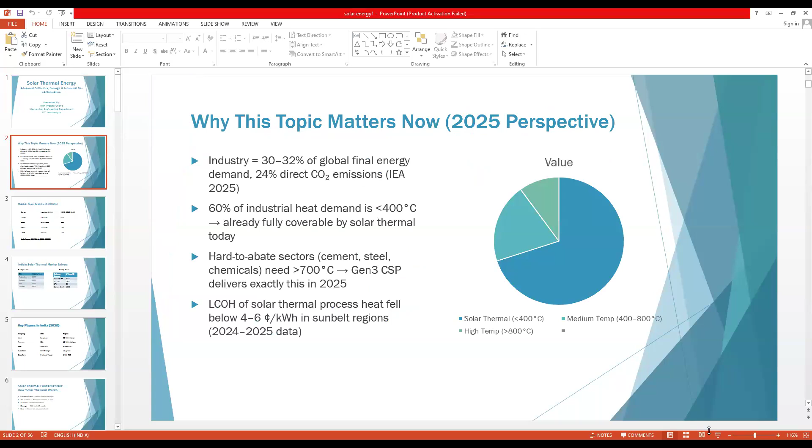First, I would like to say why we are focusing on solar thermal energy in this new era of generation. As we know, energy is the main source of economic growth of any country, and for India, with respect to global growth, we are pacing to achieve our target as per PM Modi's planning of Viksit Bharat at 2047. With that goal, we are trying to achieve the economic growth of India with the help of the energy sector, which is available and growing day by day, so that we can achieve our goal before the targeted time.

We can see that the industrial revolution came into the picture in the 1780s, when the steam engine was invented. After that, the internal combustion engine started to work, and that brought the industrial revolution all over the world. After the Second World War, energy demand increased vastly. People began using fossil fuels everywhere, in industry, at home, or in the automobile sector. Every industry began to use the internal combustion engine for their purposes, and we began depleting all the minings, like the coal sector or oil sector.

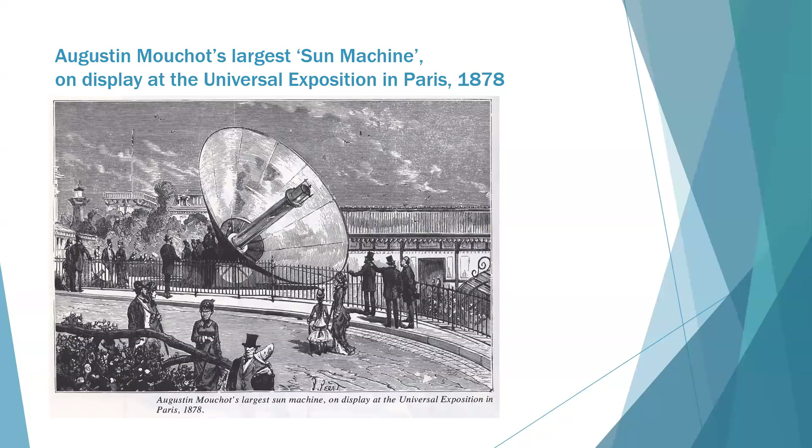This picture shows from which time we are using solar energy. This is one of the oldest pictures, where Augustin Mouchot's sun machine was displayed at the Universal Exposition in Paris in 1878. So we cannot say that solar energy is something we are using only nowadays. It took about 100 years to develop solar energy as an alternative source, because this was the first time people were thinking about how to capture solar energy for domestic purposes.

There's also an old picture of the Bell System solar battery, which converts sun rays into electricity, an advertisement from Look magazine in 1956. That was the concept when solar photovoltaic cells came into the picture, along with the thermodynamics of converting solar energy into electrical energy.

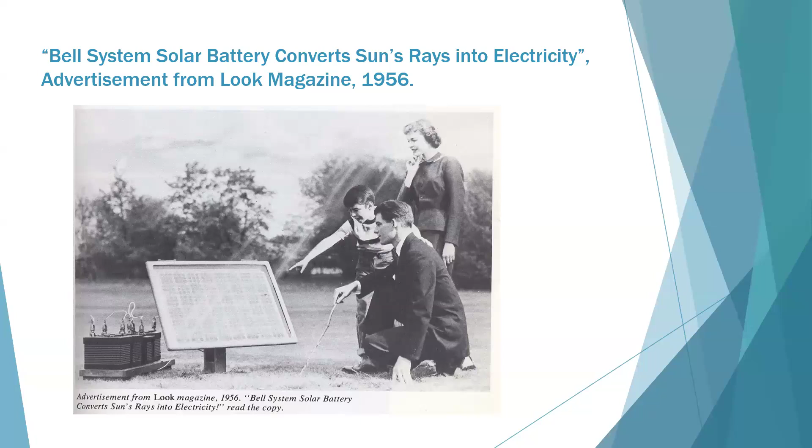Now we can say that the utilization of solar energy has various uses, and we can use this solar energy in different ways.

Here we can see that solar energy can be utilized in two ways. First is solar thermal, and second is solar photovoltaics.

Solar thermal energy can be used for heating and cooling. In terms of heating, this energy can be used as a solar air heater where air is heated, and a solar water heater where water is heated for utility purposes. The third use is drying of agricultural products, where this heating from solar energy can be utilized for drying agricultural products.

Another purpose is cooling, where solar energy can be used for the vapor absorption refrigeration cycle, for storage purposes of foods in cold storage. Another utilization of solar energy is as a photovoltaic cell for solar pumping or electric power generation.

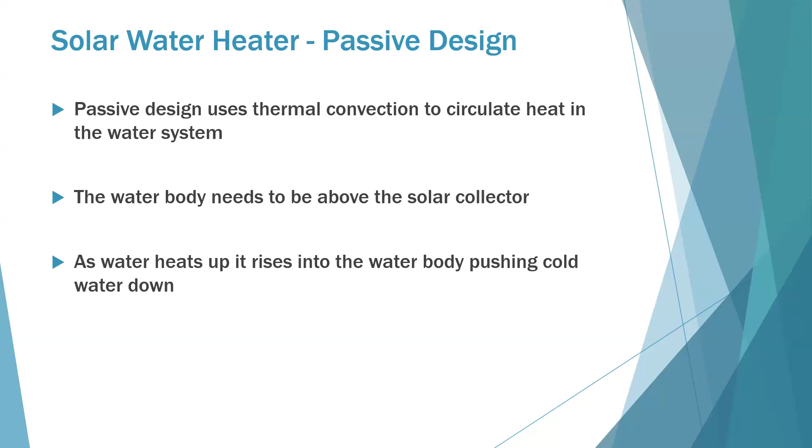And passive design means we are not providing a motor to circulate the cold water and hot water, but due to the density difference, it circulates according to the design. So this passive design uses thermal convection to circulate heat in the water system. This is a simple example of this passive solar water heater design, so natural circulation is given.

And for the active design, we have to provide a pump to circulate the water from the cold storage to the hot water system.

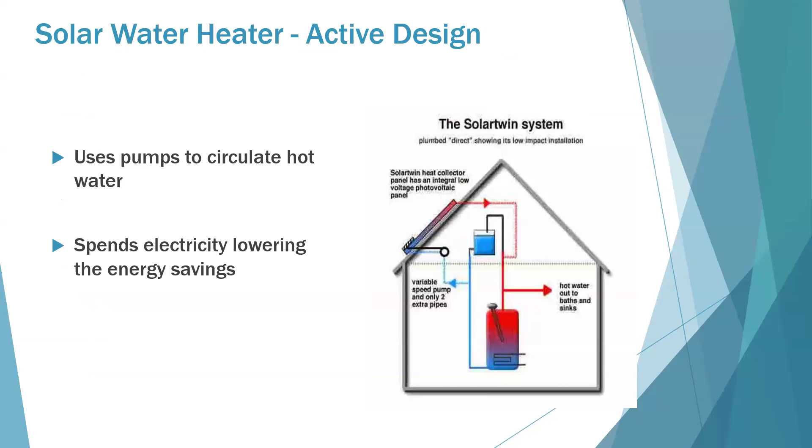Application: in a household, heating and cooling costs are among the most energy intensive domestic activities. Solar water heater can replace the cost of heating water for either a pool or hygiene uses. To demonstrate the ability of a solar water heater to offset domestic uses, interns will set up a solar water shower and hot tubs. Heating can also be provided to bioenergy activities to increase efficiency of the process or make the process more energy independent.

So we can say that the solar collector should be placed facing south and at an equal angle to that of the latitude of that place. That is the most efficient way to place the collector. And to increase efficiency further, the angle should be increased by 15 degrees during the winter season and decreased by 15 degrees in the summer. This makes the angle to the sun closest to 90 degrees during seasonal changes.

And now coming to the solar air heater, which is another application of solar energy in terms of domestic and commercial purposes.

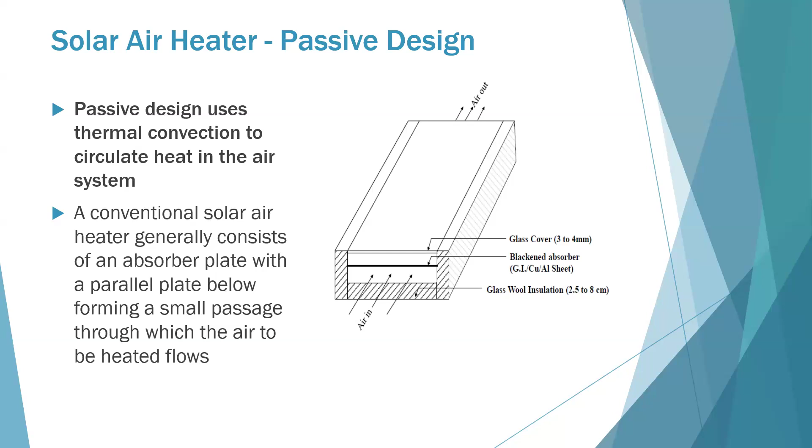This is the practical picture of the passive solar air heater design, where no motor is fitted in the system for circulation of the air, due to the hot air and cold air density difference. The movement takes place due to this.

This is another example of the solar air heater with herringbone fins. That means fins are provided under the absorber plate to increase the efficiency of the solar air heater by providing more surface area. And as we know that heat transfer depends upon the surface area, due to that we are increasing the efficiency of the solar air heater.

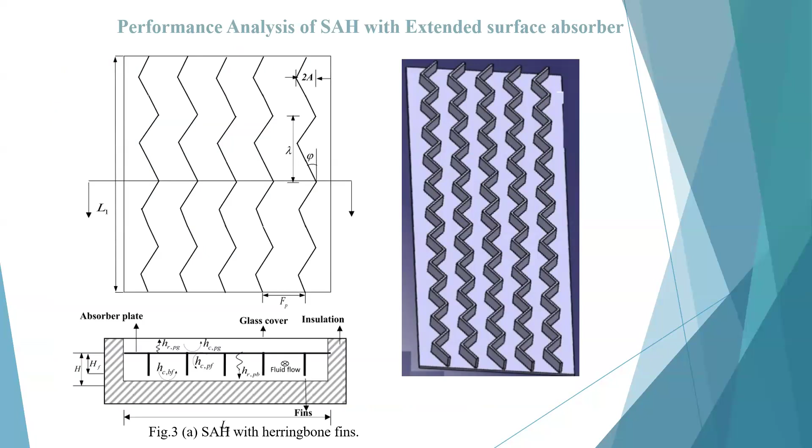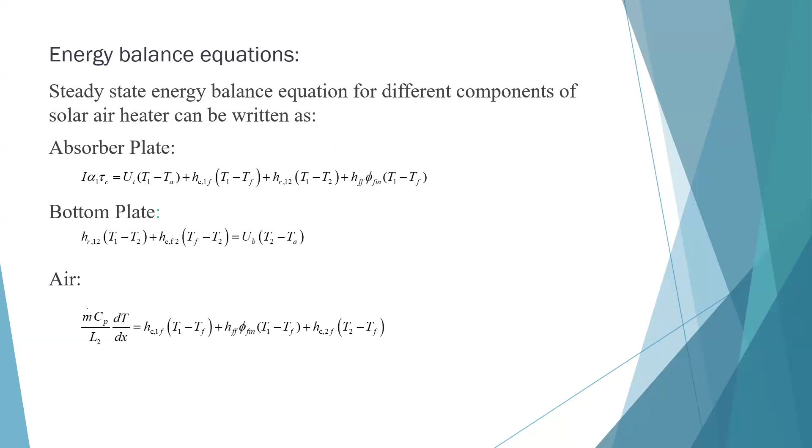We are using these equations, and in the pictorial view, we can show how the energy balance for the considered control volume for the absorber plate, bottom plate, and the air flow takes place. Upon calculating or taking the data of temperature, we can calculate the thermal efficiency of a solar collector, which is the ratio of useful heat energy gain to the total incident radiation on the collector during any period of time. And thermohydraulic efficiency, after calculating this Q, we can calculate the thermohydraulic efficiency also, and upon which we can say how efficient this solar air heater is.

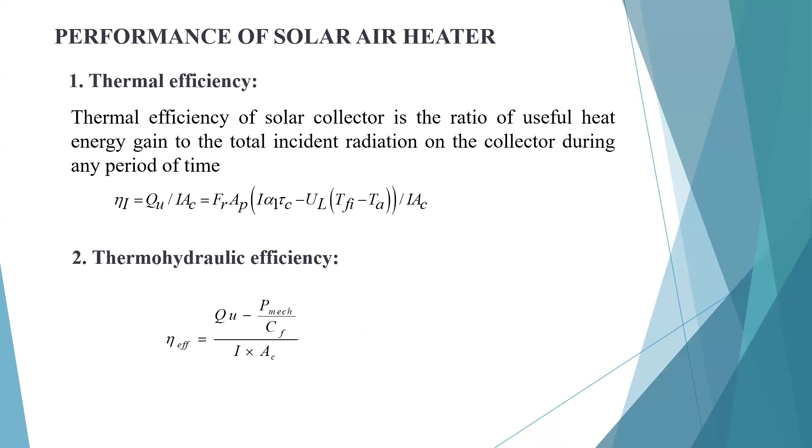So we can say that there are different types of solar air heater depending upon the different collector design. That means double exposure collector, honeycomb collector, thermal trap collector, two-pass collector, overlapped glass plate collector, artificial roughened absorber solar air heater, packed bed solar air heater, extended surface absorber solar air heater. So these are the different types of solar air heater based upon the collector design and the heat capacity resistance of the material.

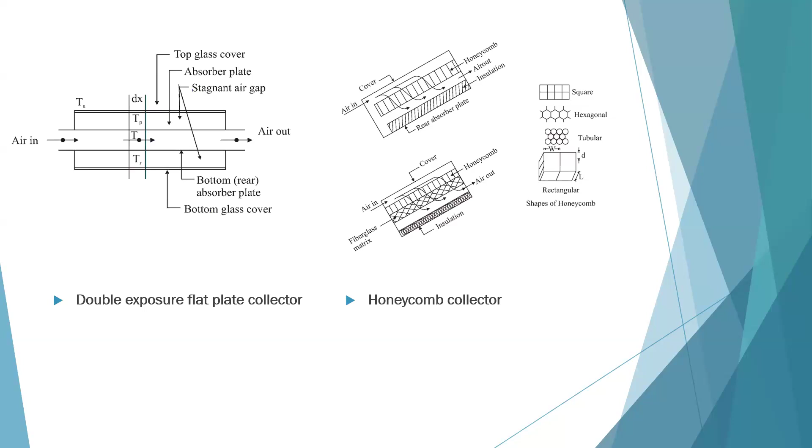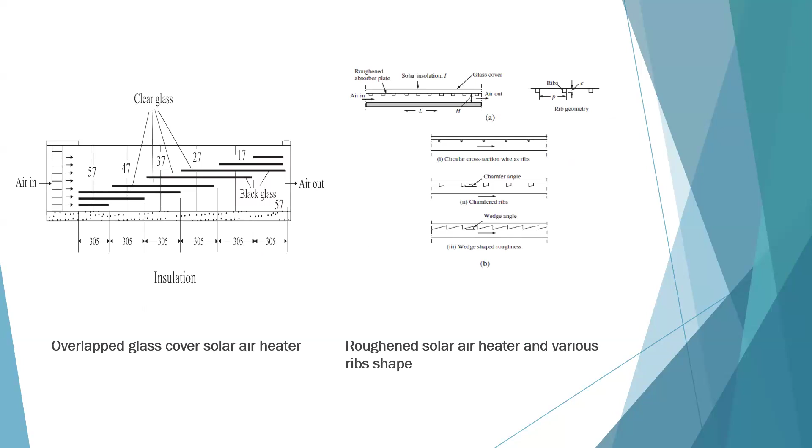So application of solar collectors, you can say that this includes solar cookers, solar chimney, parabolic trough, solar distillation, parabolic dish, solar water heater, solar air heater, and central receiver system are the main utilizations according to the requirement.

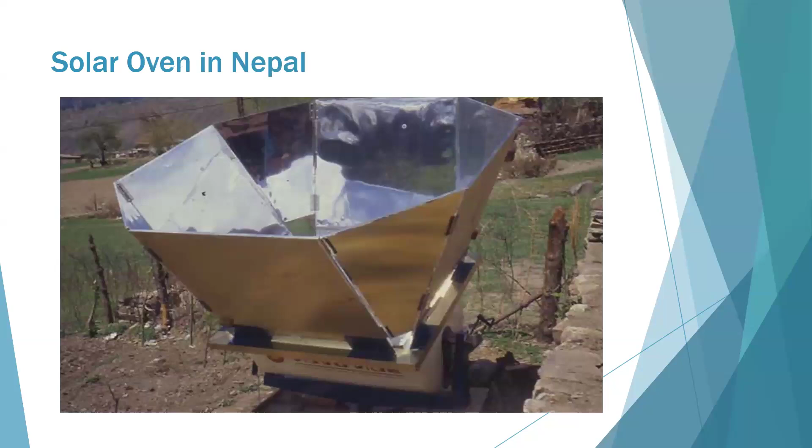Solar cooker, as just a concept of the solar heater, uses solar energy to cook the food when we are concentrating all the solar energy to a certain focus point. That means solar cookers or ovens are primarily used in developing nations as a primary method for cooking, using passive solar heat to cook the primary meals. An insulated box that collects solar radiation, enhanced by reflectors attached to each side, and that helps combat deforestation. So these are some examples or pictures - this is the solar oven we are using in Nepal.

So this parabolic dish or solar furnace is a large reflector that concentrates thermal energy into a single focal point. This focal point can contain a Stirling engine to generate electricity, or the energy can be focused and used in industrial processes. So on a small scale, a reflector can be used in the same way as a solar oven.

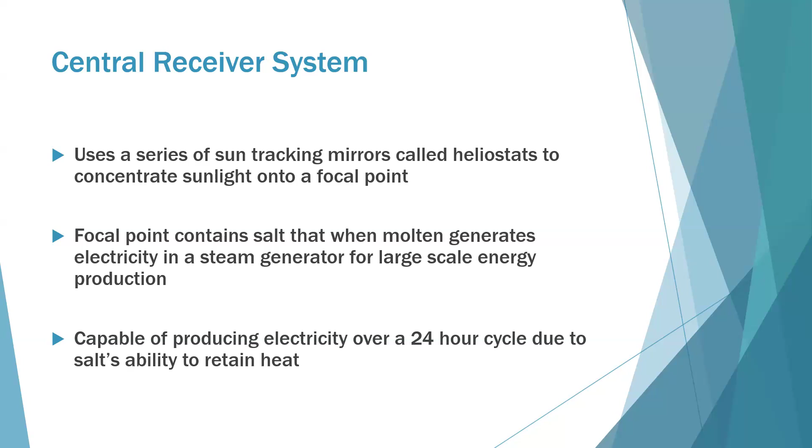Another example of solar energy use is the solar chimney. That means ambient air collected within the chimney rises as it is heated through solar radiation and drives a turbine, which generates electricity. The base captures heat through absorption of a black surface and traps it by a greenhouse interface - a very inexpensive solar collector technology. This is just one example, set up by Spain, of an erected solar chimney power plant.

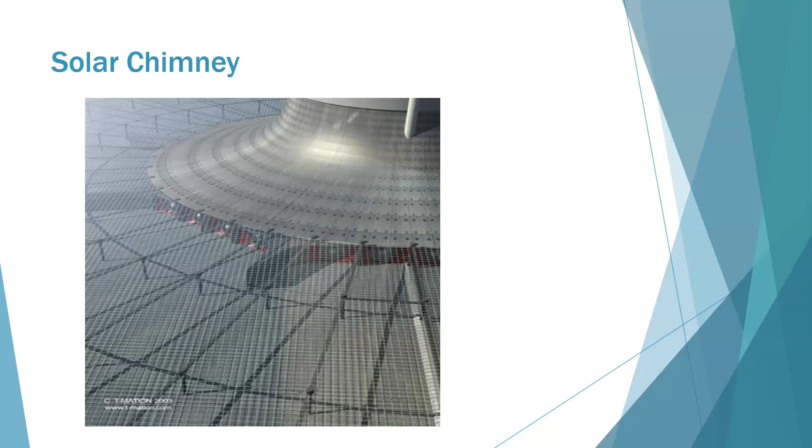Another use of solar energy is photovoltaics. This is nowadays a common topic for capturing solar energy, which generates electricity by absorbing sunlight and converting that light energy into electric current. There are many photovoltaic cells within a single solar panel, and the current created by all the cells together adds up to enough electricity to help power your home.

These are some types of solar cells we are using: polycrystal ribbon type and thin film, single crystalline silicon, polycrystalline silicon, and thin films. Nowadays, emerging technologies are arising in the area of nano solar techniques, including nano solar electricity conductive plastics, Konarka polymer, and dye sensitized solar cells, which are flexible and about 5% efficient.

Many research efforts are going on developing these different types of solar cells, which is a recent area of research. As an interesting fact, solar cells in the early 1950s were about 0.5% efficient, and today a model is about 15% efficient.

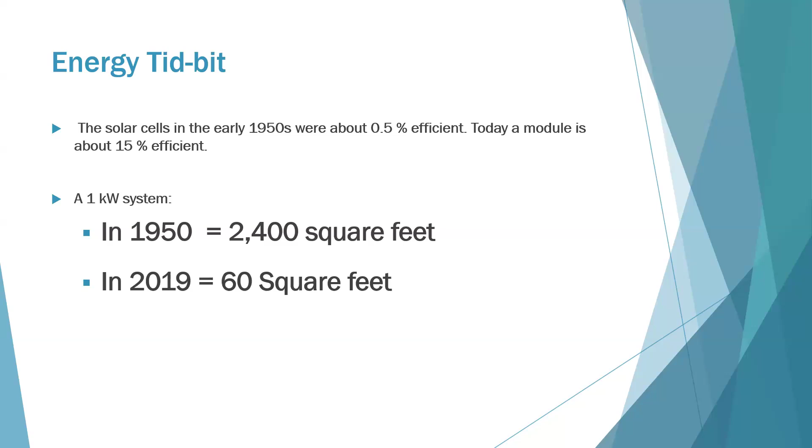This shows how we have developed solar cell technology to generate electricity, and we can say that this is the future generation of electricity equipment. In comparison to 1950, you can see how much area has been reduced, from 2400 square feet to 60 square feet, for the generation of 1 kilowatt of power.

Nowadays solar power applications in terms of photovoltaic cells have been developed in different areas of utilization. Not only e-cars, but almost every area is now using a solar power generated battery system. E-vehicles have evolved from solar vehicles to solar powered e-cars to EV vehicles, which have now become another alternative energy source.

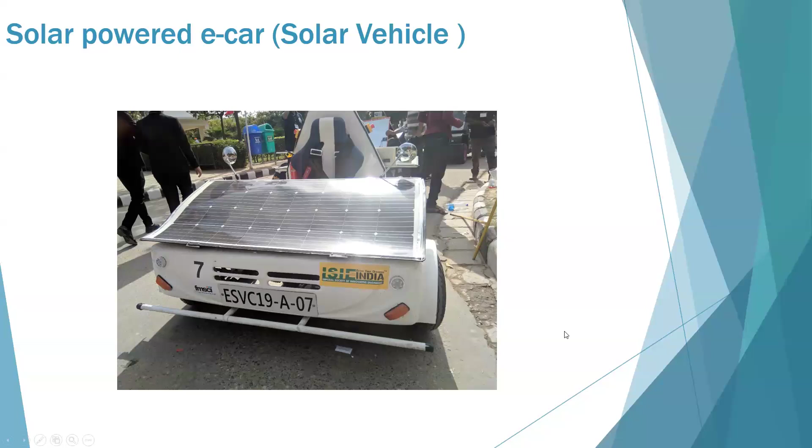So we can say that for the sustainability of our future, for our energy needs, we have to convert our mindset and our thought process from fossil fuels to this new generation of energy sources, which are more sustainable in comparison to our conventional sources of energy.

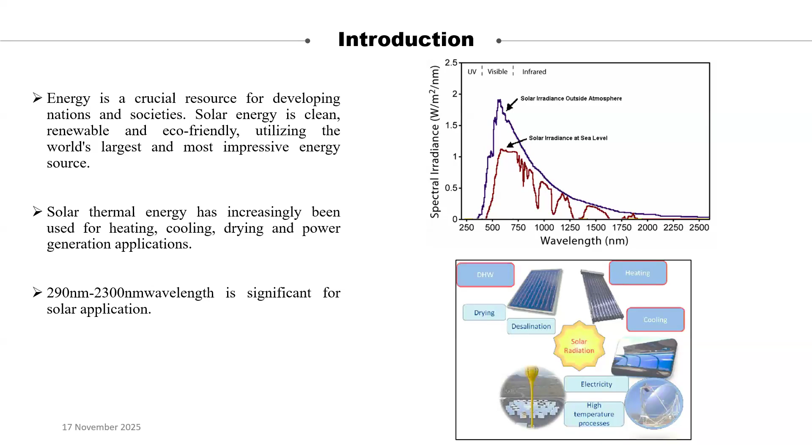So nowadays the research mainly focuses on latent and sensible heat storage.

However, 5.3% still comes from non-renewable sources and electricity, showing slow progress in decarbonizing this sector.

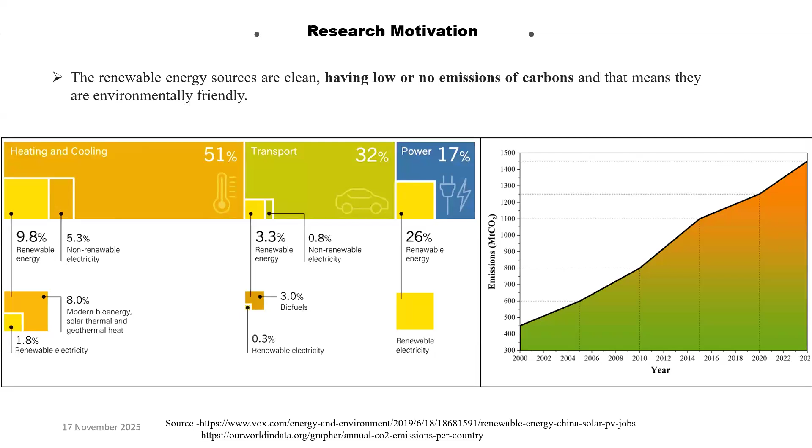So basically, the motivation behind this is to achieve low or no carbon emissions. We will also contribute through maximum utilization of solar energy to reduce CO2 emissions and global warming.

The solar air heater is the device I have mainly focused on. It is basically applied in different areas like space heating, drying farms, timber seasoning, paper mills, natural rubber, and so on. Basically, it is a non-polluting, renewable based energy device.

As in the case of the liquid flat plate collector, a transparent cover system is provided above the absorber plate, while the sheet metal container is filled with insulation provided on the bottom side.

In double pass, we can say there are more advantages compared to single pass, because there is less loss of energy due to the double pass. In single pass, losses mainly occur from the upper side, the glass side, as heat energy.

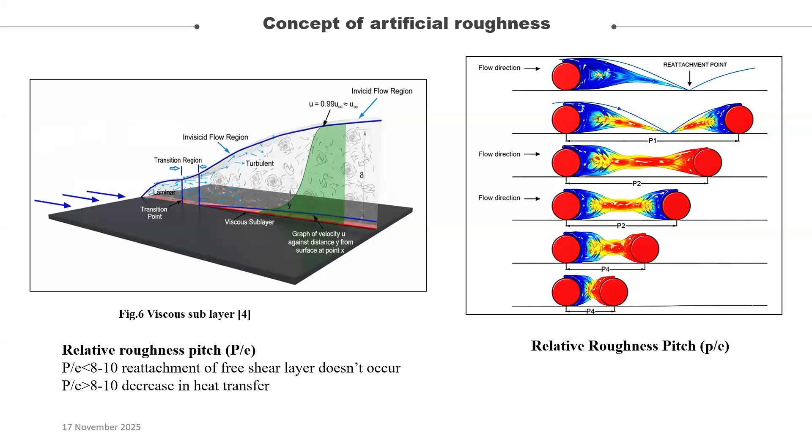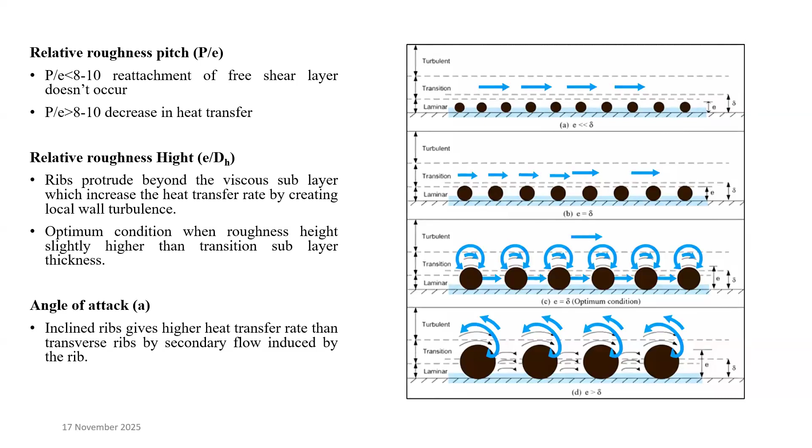The second parameter is the relative roughness height, e by Dh. The height of the roughness also plays a crucial role. If we do not optimize the roughness height, there is an enhancement of pumping power and losses of energy. So it is necessary to optimize the height of the roughness. The angle of attack also plays an important role, because it specifies the angle at which air flows over the absorber plate.

With thermal storage and without thermal storage, comparing both of them to specify which gives good performance. This involves the mathematical modeling and CFD analysis of the solar air heater.

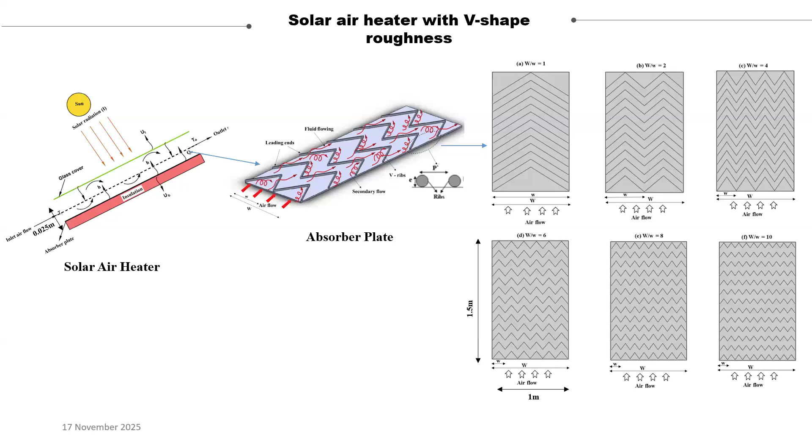After this analysis, thermal storage and CFD analysis will be performed following the mathematical modeling. There are some governing equations: the radiation transfer equation, continuity equation, momentum equation, and energy equation, which will be utilized in the CFD analysis to perform the analysis of the solar air heater.

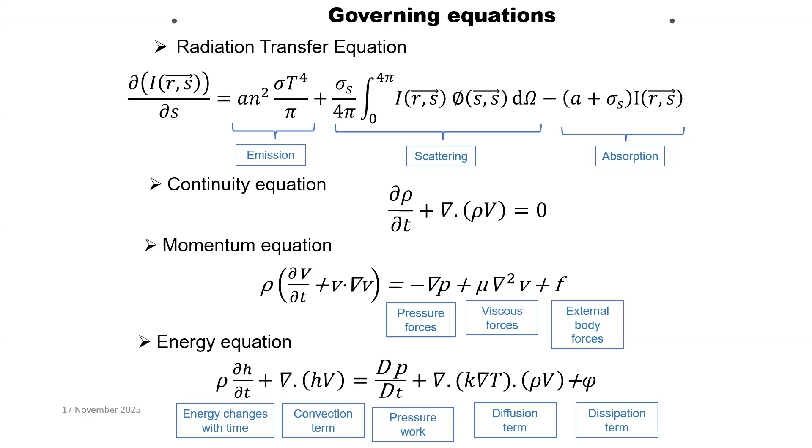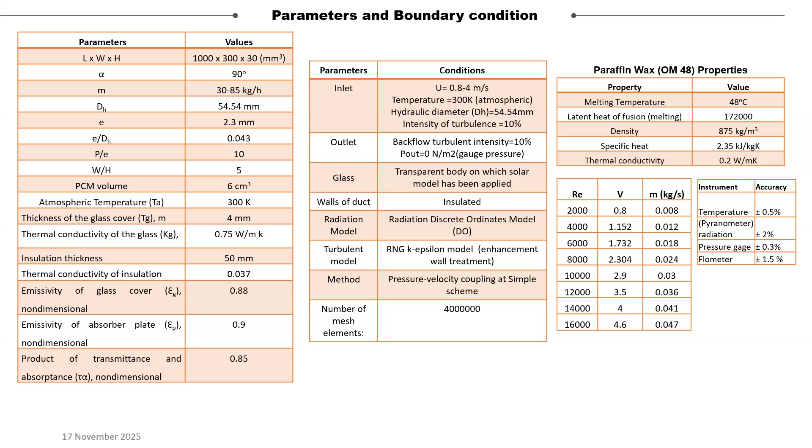For the thermal storage detailing, I have utilized paraffin wax, an organic PCM material OM48, which has a melting temperature of 48 degrees Celsius, a latent heat of fusion of about 172,000 kilojoules, a density of 875, and a thermal conductivity of about 0.2 watt per meter Kelvin.

This is the temperature contour for different roughness values of the absorber plate, which I have utilized as 1, 4, 6, 8, and 10.

We can see different temperature zones and contours shown on the absorber plate. Without roughness, the smooth absorber plate has high temperature, but the energy transfer from the absorber plate to the fluid is much less compared to the roughened parameter.

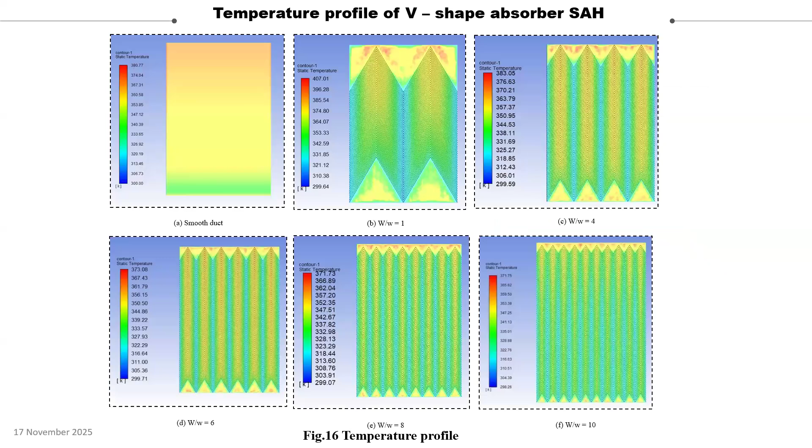So in further analysis, we can specify what is good for our absorber for our setup.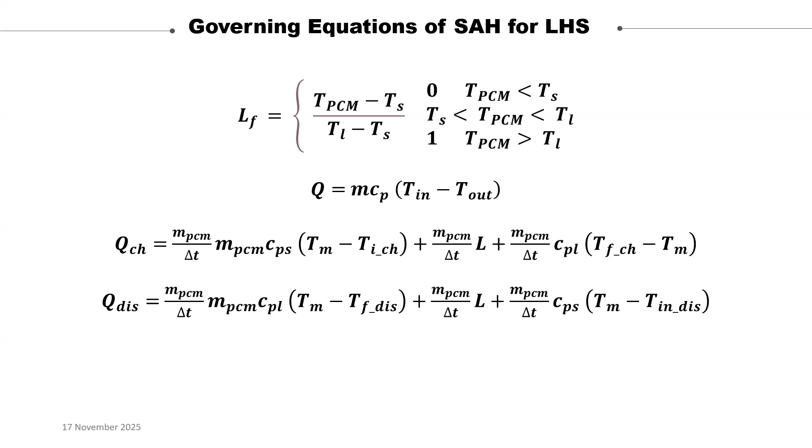The governing equations use the enthalpy-porosity method for the PCM to analyze melting and solidifying. A value of zero corresponds to solid, and one stands for liquid phase. With the help of this method, we analyze the performance of the PCM.

Based on the latent heat storage, it stores energy which we can use after sunset. So we switched off the artificial radiation mode to see how much time we can use this stored energy after the sunset, or after switching off the radiation.

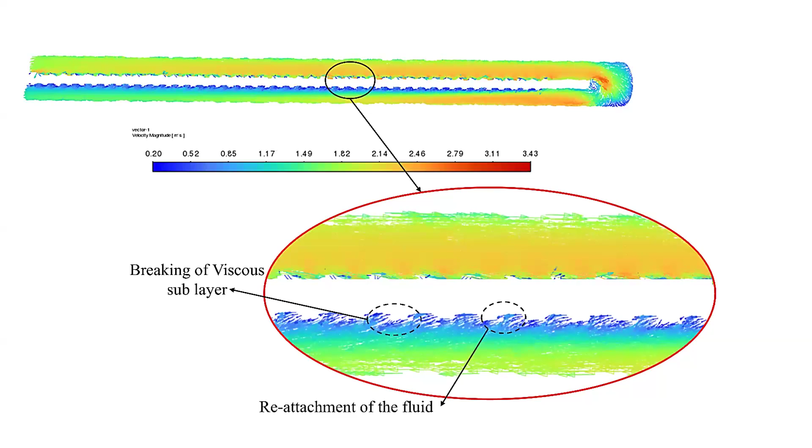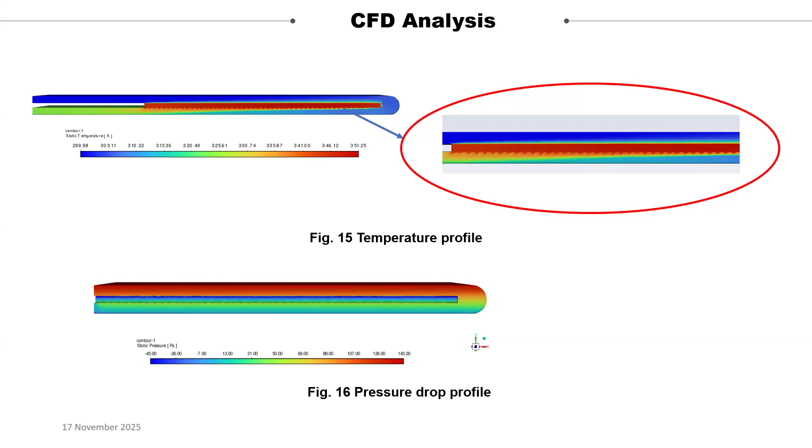This is a pressure drop. We can see the pressure drop also plays an important role in our setup, because we can find out the friction factor and pressure drop in the system, and how much power is utilized by the blower.

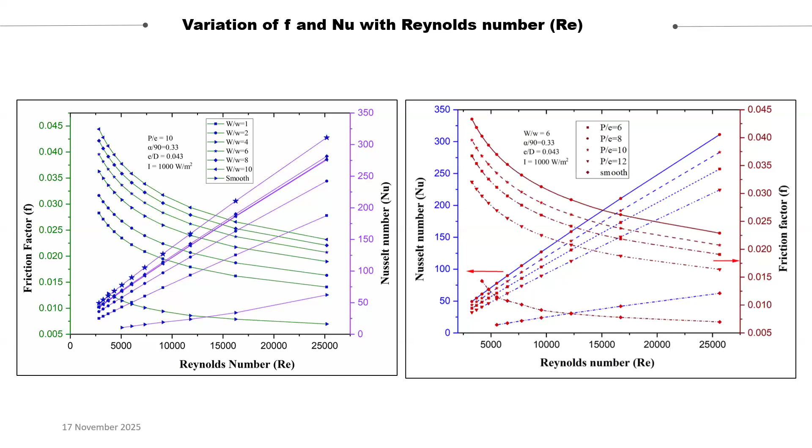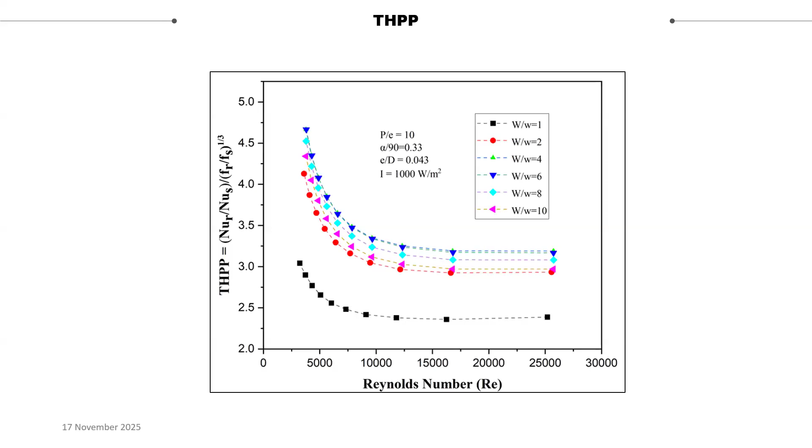The THPP, thermal hydraulic performance parameter, shows different values for different width ratios. Width ratio 6 also maximizes the thermal hydraulic performance, decreasing with increase in Reynolds number, with an average of approximately 3.0. THPP is actually the ratio of the Nusselt number of the roughened to smooth plate, divided by the ratio of friction factor of roughened to smooth plate, to the power 1 by 3. It is a dimensionless number which shows the performance of the absorber plate.

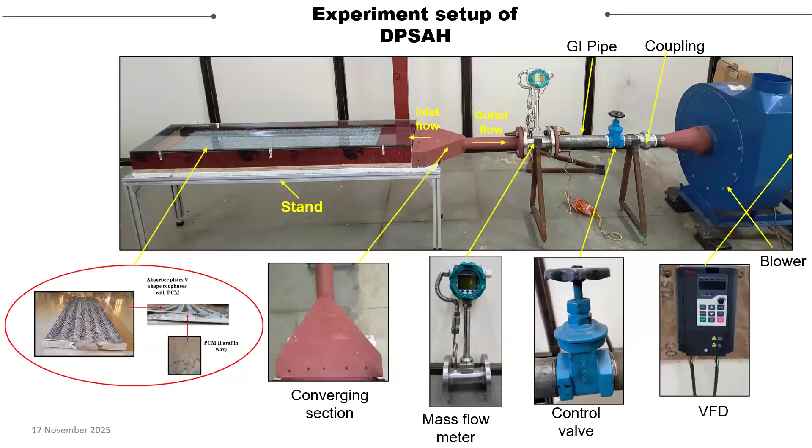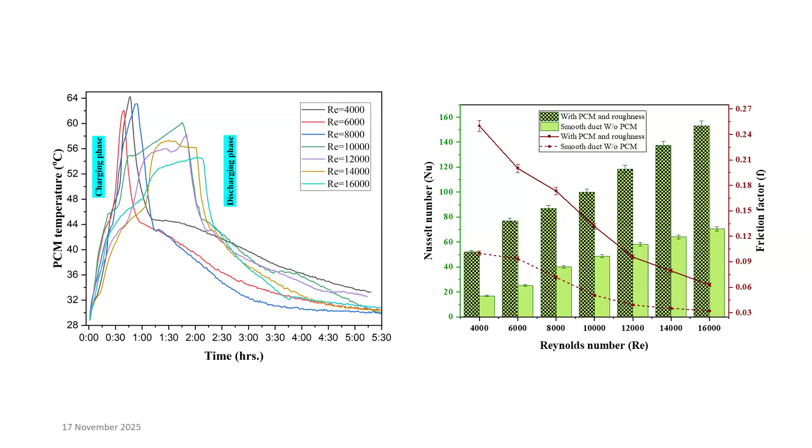This indicates the higher mass flow rate and hence the turbulent effect by the artificial roughness near the absorber plate, and the ribs configuration which breaks the viscous sublayer and creates free flow, hence greater convective heat transfer coefficient transferring energy to the air. At a lower mass flow rate, approximately 4,000 to 6,000 Reynolds number, it exhibits lower thermal efficiency, approximately 30 to 45%.

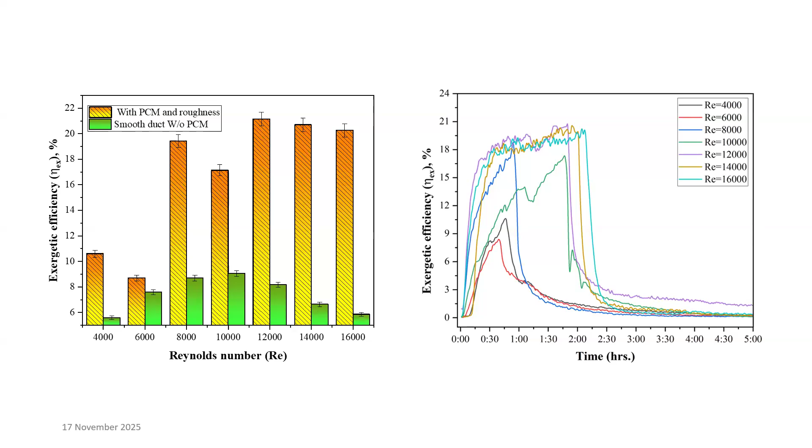Compared to the smooth duct, we can see there is much more exergetic efficiency with roughness and PCM. The right hand side graph shows the exergetic efficiency at different Reynolds numbers with respect to time.

And the heat storage, we have specified with Reynolds number. The heat storage with charging heat, discharging heat with respect to charging time and discharging time is shown in the figure.

In THPP, we can see the thermohydraulic performance from the experimentation. It shows higher values at approximately 6,000 Reynolds number and lower at 12,000 Reynolds number for the thermal hydraulic performance parameter at different Reynolds numbers.

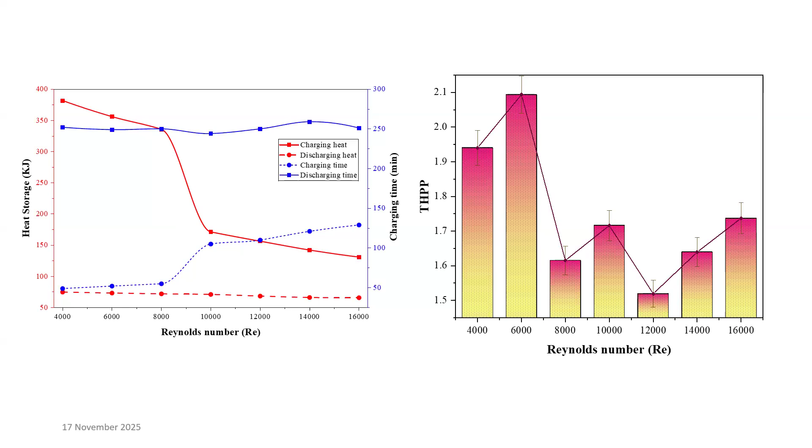So this is now the experimentation and CFD parts of our setup. Now, the social impact of this includes drying agriculture products like grains, fruits, vegetables, as well as seasoning food. In winter, solar heaters are used to heat a house and save energy. It is also a non-polluting and renewable energy source.

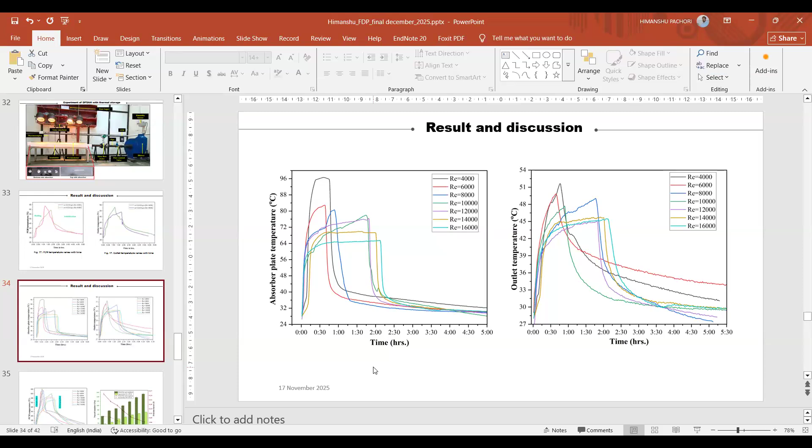Here the Reynolds number you had taken as 2000 also, but in your results you had not discussed the values at Reynolds number 2000, because in all the graphs I think Reynolds number started from 4000 onwards, is it? Yes sir, I actually used 2000 in without PCM, and in PCM I started from 4000, because at 2000 there is no effect in PCM. In without PCM I started from 2000 to 18,000, and with PCM I utilized 4000 to 16,000 because of the benefit.

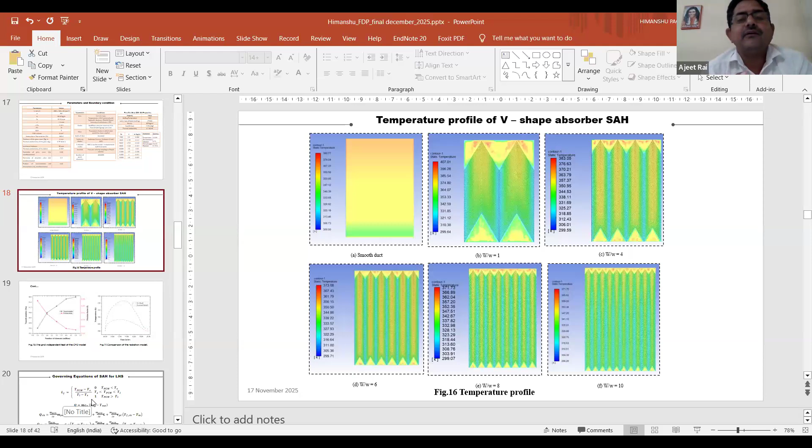Actually, I wanted to know when the Reynolds number was 2000, what was the mass flow rate? This Reynolds number is for the air. So what was the mass flow rate? This is 0.008 kg per second.

So was it possible in your experimental setup to control this mass flow rate? Actually, yes, approximately, because our experimentation blower starts from approximately 3000. That's why I have utilized in simulation only approximately 2000 to 18,000, but during experimentation it was difficult to achieve below this. So that's why I started from 4000, because turbulence also starts after 2000, since our setup is designed only for the turbulent effect of the air. So after 2000 it is beneficial for experimentation. Additionally, I have also checked what happens at 2000.

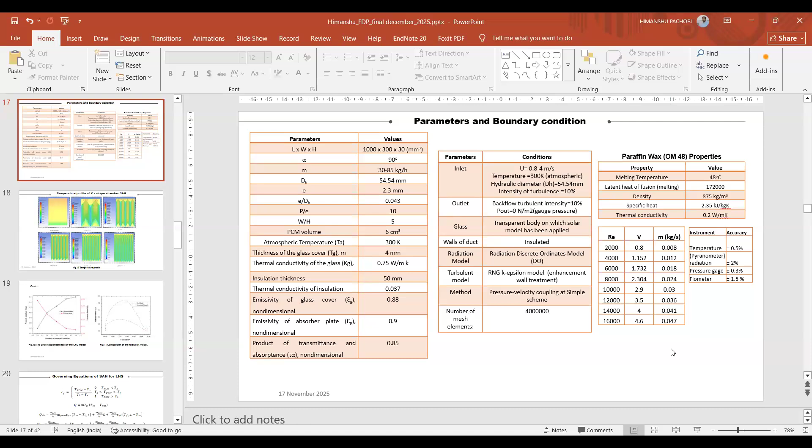So was it included in your experimental setup to measure the mass flow rate of the air at the outlet also? Yes sir, this setup shows the outlet mass flow rate from the mass flow rate meter.

Okay, so the same mass flow rate will be used. So it was only with the mass flow rate that you controlled the whole Reynolds number? No, no, from the mass flow rate I calculated the Reynolds number, the mass flow rate was converted into the Reynolds number.

But I controlled it with the help of this VFD, a variable frequency drive, which controls the blower, the speed of the fan. So you are having a variable frequency drive that automatically controls the frequency and speed of your blower, so you can control it.

The flow rate is adjusted accordingly, and that's why the fan speed is regulated. As we can see in our fan, the control regulator is there, so we can control 1, 2, 3 modes - similar to a three-phase blower, but with the help of VFD. Okay, this is very clear to me.

You have changed the Nusselt numbers also from a particular range to this particular range. Yes sir, and the graphs have been run. How was this Nusselt number changed? Actually, Nusselt number is directly related to the Reynolds number. If the Reynolds number changes, the Nusselt number also changes.

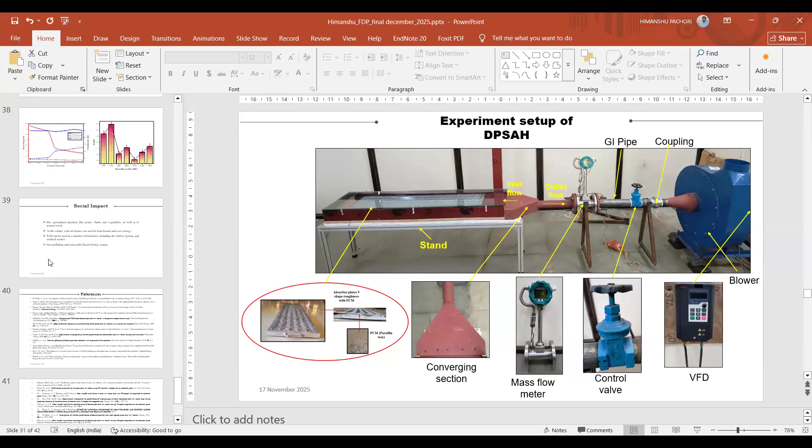For our result purpose, either we talk about the variation of only the Reynolds number, or we may talk about only Nusselt number. But in a particular graph, we have shown the variation of Nusselt and Reynolds both separately - I think it was there in a particular graph, yes sir, in the experimental graph I have shown.

I just wanted to ask, so that I could understand, how to control both things separately by heat transfer - addition of heat, because it is conduction, and ratio of convection and conduction, HL by K, as you said.

Actually, Nusselt number directly depends on the Reynolds number. That's why it is on the y-axis and Reynolds number on the x-axis. When we change it, at higher Reynolds number it shows the increment or decrement of the Nusselt number with respect to the graph. Because of the heat transfer, Nusselt number actually shows the heat transfer rate from the absorber plate to the air.

So it directly depends on the mass flow rate. Nusselt number is a function of Reynolds and Prandtl number - if it is forced convection. If it is free convection, then Nusselt is a function of Grashof and Prandtl number. So fundamentally, Nusselt number is a function of not only the Reynolds number but also another number.

That's why you have drawn this curve, because both are independent variables. Yes sir, but I have also mentioned the Prandtl number because it is actually a fixed parameter, 0.7 for air. So that's why we only have the option to vary the Reynolds number, and that's why we have shown the Reynolds number with respect to the Nusselt number graph.

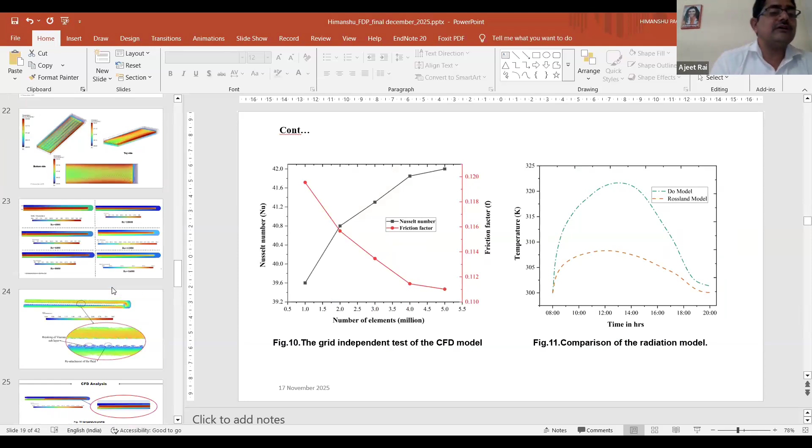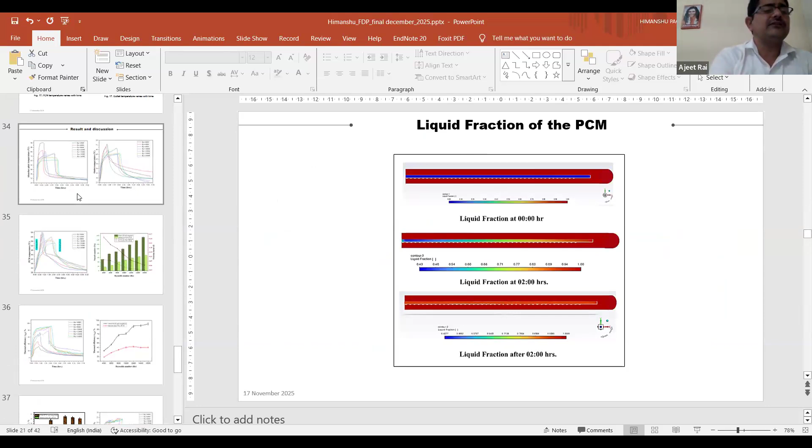I think it was the bar chart. Just move further. I think last you have drawn, because with PCM and without - yeah, this one, I think slide 35.

But it is a very smooth curve, no? Just come later - I think after 38, is there anyone? Slide number after 38, 39? No, just move further after 38. No, it is not there. Okay, you can see in slide number 38.

Because, 38 - okay, just this slide I wanted. Yeah, thank you, this one. Actually, exergy efficiency was given, and it was very uncommon to see. In another graph, also a bar chart, I had seen when the Reynolds number is 11,000 - I think it was earlier 10,000 in another graph you had shown earlier.

Yes sir, the thing was not very smooth. Here in this particular exergy efficiency versus Reynolds number graph, you see at 8,000 it is going higher, right? At 6,000 very low, at 8,000 very high. If the trend is to increase, let it be 10,000 - but it is getting decreased. Again at 12,000, it is increasing.

At 14 and 16 there's again a rise, but from 14, 12 to 16 a systematic fall down is there, right? Before that, an abrupt change was observed at 10,000. So what have you observed? Is there anything special you've noticed, or is this just the nature of the results we obtain?

Actually, this nature of the result I obtain, I think mainly the PCM melting temperature and solidification and melting of the PCM also plays an important role in this zigzag pattern. So without PCM, we can observe that there is a slight increment or decrement of the exergy efficiency.

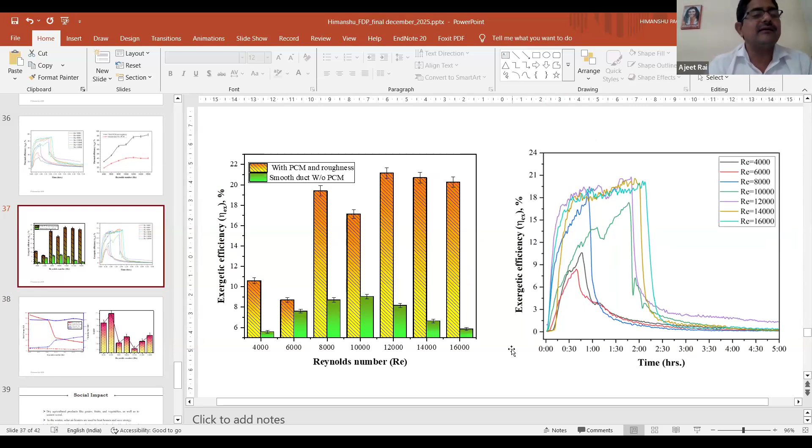Okay, so another graph like this bar chart, was it the exergy efficiency or maybe the thermal efficiency? If that chart is there... Just one, be back. Last slide you have shown, just come to the last slide.

This one is there? Okay, just one minute. In the case of THPP, but on some other I had seen earlier, 8,000 lower, 10,000 higher, again 12,000 lower. But this may be due to the PCM, as you said.

Yes sir, maybe the case. Nice, since it is an FDP, that's why I asked everything to you, otherwise I could not have asked, because it will certainly enlighten me for the experimental purpose also.

For the simulation purpose you had used software, and it is available in your library. In experiment, there are multiple factors - environmental, also melting solidification, a different zone also matters on this setup. So that's why these changes are here.

In the morning session, some experts have also talked about these nanoparticles, and it was common to use aluminum oxide nanoparticles. But when we use it, it's not uniformly getting distributed, and some problems we have observed several times.

Unfortunately sir, I started to talk about the paraffin, and I started with the aluminum oxide, but I was somewhere else.

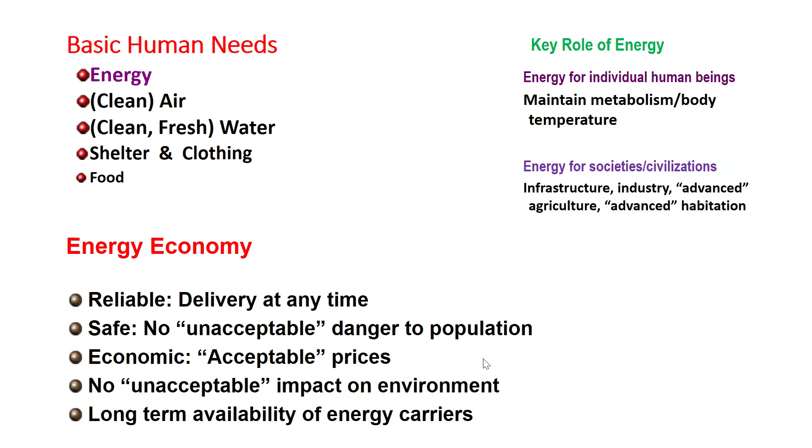So when you talk about sustainable future energy, it should be reliable - available at any point of time. It should not create any danger to the population, and the price should be reasonable. It should not create any unacceptable impact on the environment, and it should be available for the long term. These are the various requirements of a sustainable energy source.

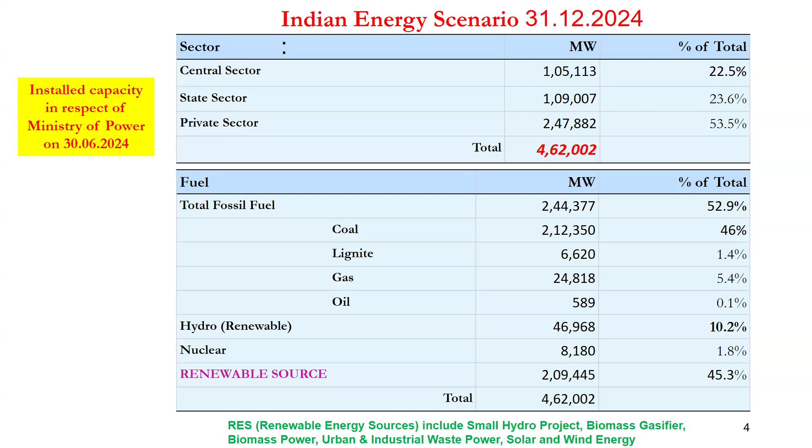This is the current energy scenario - though the information is a little old, about 8 months, the trend is more or less the same. Right now we have roughly about 4,60,000 megawatt installed capacity. Around 50% of this is from fossil fuel, and the remaining renewable, if you include hydro, is roughly about 50%.

We are of course much healthier than the world average. If you compare these three forms of energy - fossil, renewable, or nuclear - fossil is safety-wise fine, but the major penalty is CO2 emission, and cost is moderate. Coming to nuclear, waste disposal is a major concern; otherwise the technology is fine and safe except for waste disposal.

Availability for nuclear is unlimited. Now coming to renewables, here it scores in all aspects - it's clean, available, abundant, and safety is very high. There is no concern of safety here. The cost has come down now. If you go without storage, you can generate one unit of electricity at a cost of about 2 rupees 30 paise.

Coming to the energy scenario globally, around 13% of the population do not have access to electricity - this is still a concern. Another big concern is the cooking sector; around 40% of the world population do not have access to clean cooking fuel. As a result, tremendous deaths are being recorded in this sector. Even in India, we are losing nearly 3 lakh people every year, mainly due to improper cooking practice.

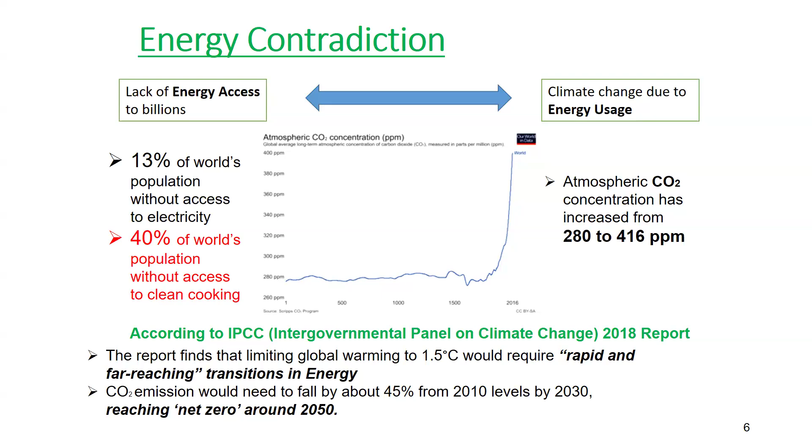To counter this scenario, the government is now promoting clean cooking fuel in several forms. The world has also taken serious concern about this cooking issue, and is trying to implement several sustainable solutions.

Coming to the Indian perspective, we use LPG predominantly for cooking applications. We are now exploring other options such as methanol, ethanol, and even hydrogen, but it will take some time. However, we are not self-sustained in terms of LPG - almost 50% of our LPG requirement is imported, and as a result we are spending roughly 40 to 50,000 crore mainly on LPG import.

By 2030, our government is planning to cut down the LPG import by about 10 to 15%. Another scenario: the increasing LPG demand every year. Roughly about 8% it is increasing, and LPG consumers are also increasing steadily. Right now we have 33 crore LPG consumers in the domestic sector, and this number is going to increase in the upcoming years. Similarly, we also have significant consumption in the industrial sector as well.

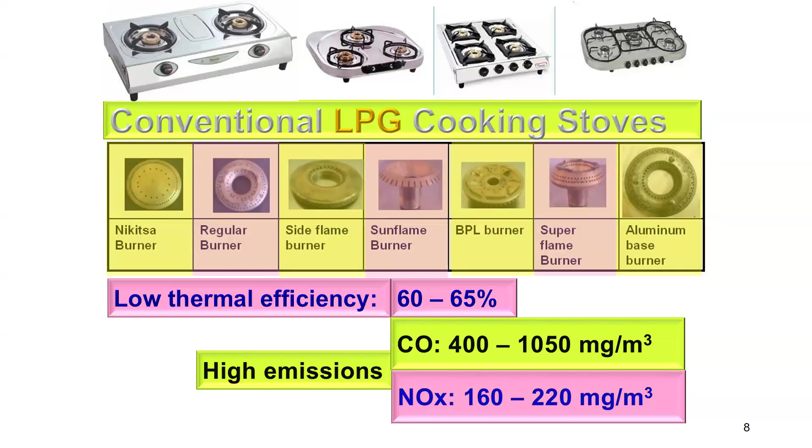So these are the various cooking options available for us, the various types of burners like Nikitsa burner, regular burner, side flame burner, sun flame burner, etc. Like this, we have several. Most of these burners have roughly about 60 to 65% efficiency, this is the energy utilization efficiency, and most of the burners have high emissions in terms of CO and NOx. So none of these burners fulfill the requirement of the World Health Organization.

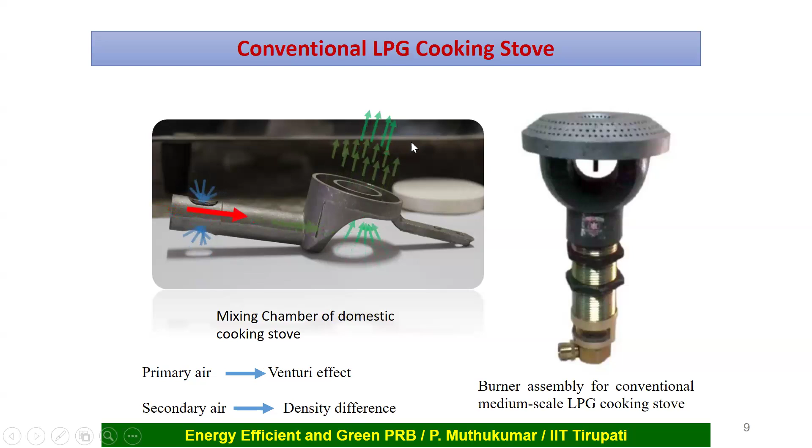This burner works on free flame combustion. The LPG is injected through the nozzle, and at the exit of the nozzle, since low pressure is created, natural air will entrain. When it passes through the mixing tube, you can see here there is a tube, air and fuel get mixed, and when it reaches the top of the burner, it gets combusted. So you can see the flame. It's a free flame combustion.

There is a standard, 4246, which defines the thermal efficiency and provides the specification of the domestic burner, and also defines the performance of the burner. The performance is tested by conducting the standard water boiling test. You take an aluminum vessel of a required diameter and about 8 to 10 liters of water, this quantity varies with the power rating of the burner. Then heat it from atmospheric temperature, say 30 degrees Celsius, up to about 90 degrees Celsius. During heating, the enthalpy gained by the water along with the vessel is the output, that is MCP of water plus MCP of vessel multiplied by the temperature difference. Input is the mass of fuel consumed during this heating process multiplied by the actual calorific value. The ratio gives the thermal efficiency.

During this process, the vessel need not be insulated, and it should be exposed to the atmospheric temperature in the range of about 28 to 30 degrees Celsius.

As per this protocol, the thermal efficiency of the best available domestic burner ranges from about 60 to 65%. When the burner is operated at high power, the efficiency will be about 60%. Similarly, the efficiency of burners available in big restaurants or used in college hostels, whose power rating can go up to about 25 kilowatt, is very low, in the order of about 20 to 25%.

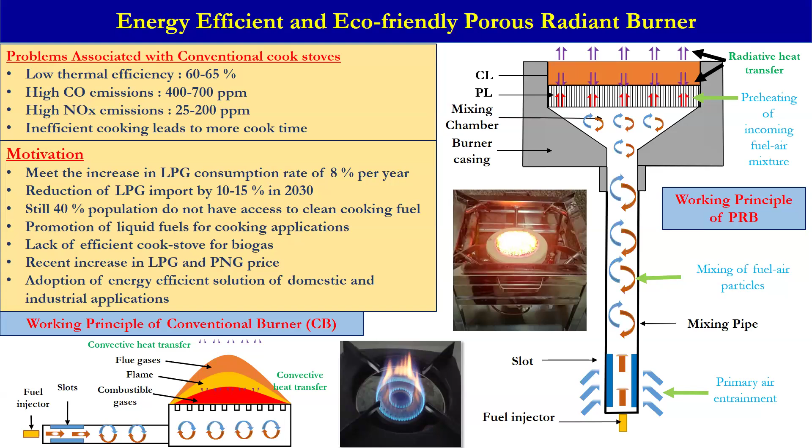By preheating the incoming air fuel mixture and allowing the combustion to happen inside the highly conducting and porous matrix, we could get fuel saving up to about 60% in comparison with the conventional burner. And also we could minimize the CO emission by about 85%. This can be achieved by complete combustion of the fuel.

So now we are going to see the several prototypes and in fact the actual systems developed. Mostly we are concentrating on the commercial scale systems. For example, you can see here this single one having the capacity up to about 5 to 7 kilowatt capacity.

Here we could get thermal efficiency reaching about 65%. Corresponding conventional burner efficiency is about 30 to 45%. So here we could get fuel saving of about 40%, and in some cases about 60% for the same capacity. Then the cluster, that is the 3-burner system, we could get savings up to about 50%. In addition, we could also reduce the emission by about 85%.

Then, in fact, now we scaled up this system up to about 15 burners. What you are seeing here is the 7 burners. Similarly, we have 9 burners, 11 burners. We had up to about 15 burners, which can have the power output of about 100 kilowatt.

These massive burners are used for cooking, preparing food of about 1,000 kg in a day. Such a system is already installed here in one famous temple, Sri Kalahasti temple, and it's been in operation for almost 2 years.

And similarly, the technology is also extended for other gaseous fuels such as biogas, and now we are going to adopt it for hydrogen also, and dimethyl ether, methanol, ethanol, many fuels of course.

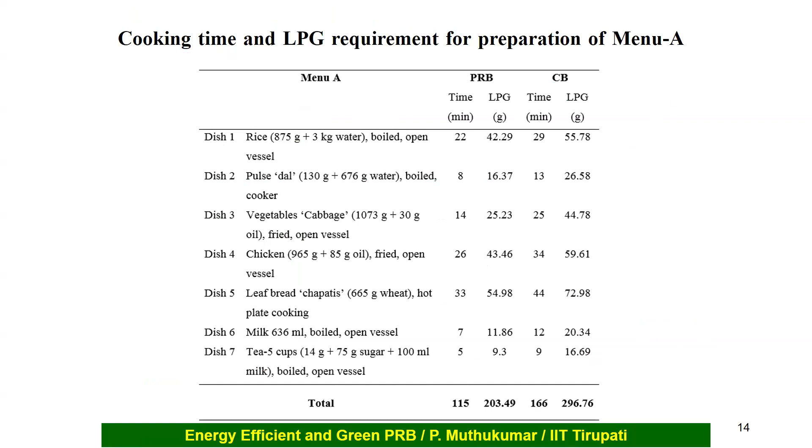And our burner not only saves fuel, but also saves time. That can also be possible, and you can fine tune it. Maybe if you keep the power output slightly lower, you can get more than 50-60% fuel saving. And if you want faster cooking, yes, that is also possible. Either way, you can have it.

So for the domestic application, we have performed many experiments, and many dishes have been prepared in parallel with our burner and the best star-rated conventional burner. This is for a family of 4 members. In a day, preparing various dishes, our burner consumes about 200 grams of LPG, whereas the conventional burner consumes about 300 grams of LPG.

And the time also you can see. Our burner takes only 115 minutes, whereas the conventional burner took nearly about 166 minutes.

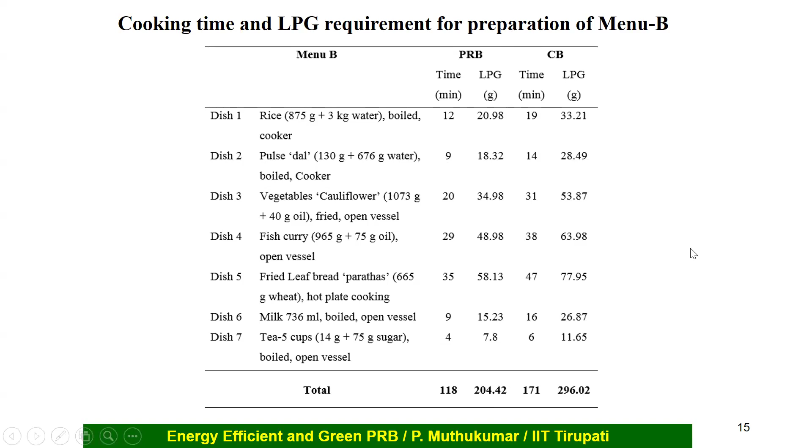So if you want to launch any product to the commercial market, it is essential to do the life cycle assessment. Life cycle assessment means, throughout the lifespan of the product, not only during its life but right from manufacturing, that is extraction of raw material, manufacturing at various stages, and transportation, and throughout the lifespan of the product, what is the impact created on the environment.

Okay, this you need to do.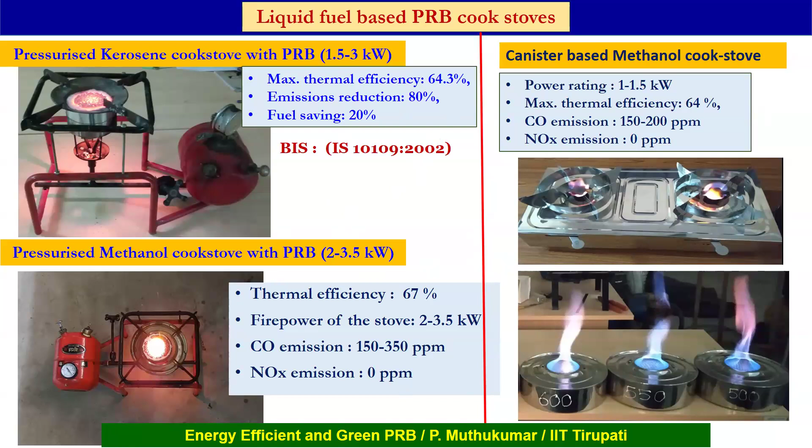We also extended this technology for gaseous fuel and kerosene. This we mainly developed for some specific applications, and we have also done it for methanol and ethanol. The BIS standard is already adopted for methanol and ethanol stoves. And again, for canister-based stoves with methanol, we have developed that too, as requested by NITI Aayog. Our group has also published the BIS standard for this.

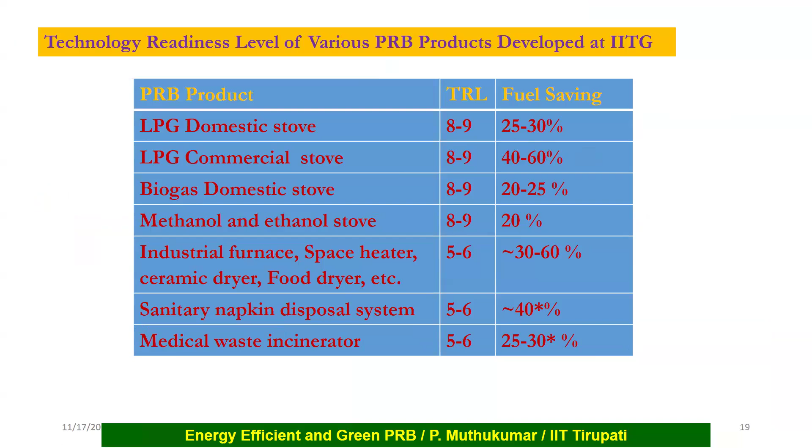Currently, we are working on the development of a porous-media burner based medical waste disposal unit, as well as a sanitary napkin disposal unit. That is already fabricated and experiments are going on. We have several such applications and many are already implemented, for example heaters, space heating and drying. Recently we have also submitted designs for the dairy industry and pharmaceutical industry. We have supplied these and they are working beautifully.

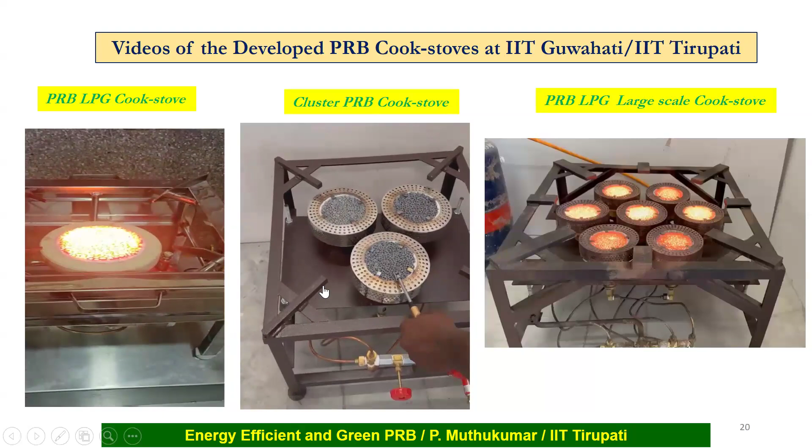Now you can see here some of these videos. I'm also enabling the sound.

So when you ignite it, it takes nearly 30 to 40 seconds to stabilize. Once stabilized, it becomes red hot, like an electrical element. Now you can see the burner is fully in operation, and there won't be any flame here. The second beauty is that the heat is directly transferred to the vessel.

In the case of a conventional burner, the flame completely hugs the vessel, and as a result the heat loss is more. But here we could minimize the heat loss to the maximum extent possible, and all the produced combustion heat is transferred to the vessel through radiation.

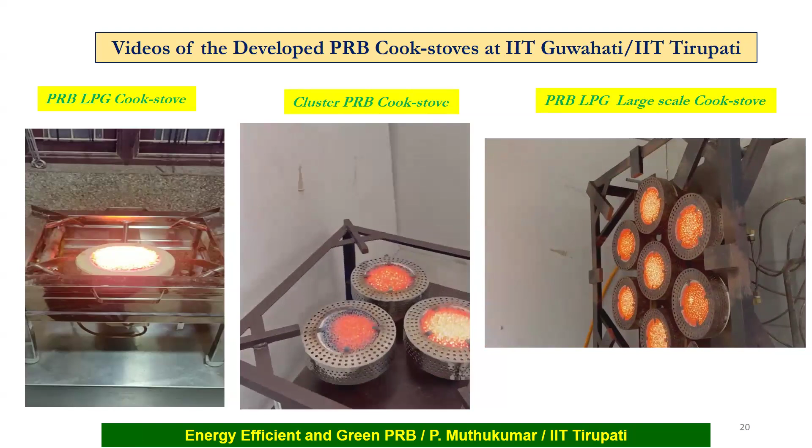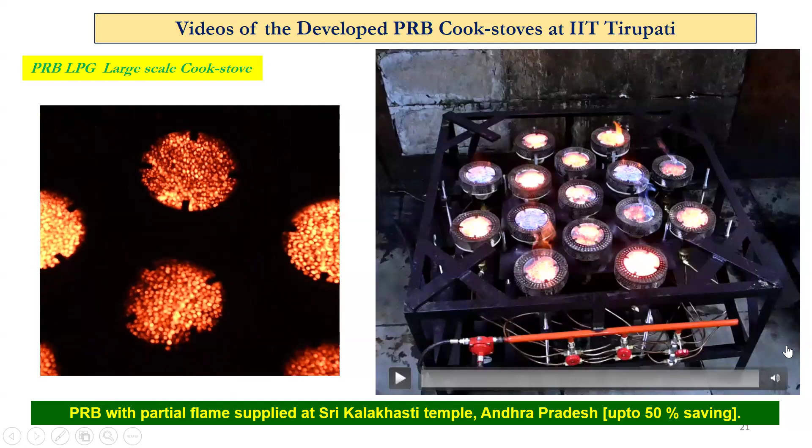This is one bigger installation we implemented at the Sri Kalahasti temple. There, the cooks first have to light the burner with a little bit of flame, for their convenience. So we made it with a little flame, and it can be modified as needed.

You can see here the bigger installation with various things. We installed this burner in December 2023, and it's been almost 2 years in successful operation. They prepare food for nearly 7,000 people per day. In some specific cases they reported fuel savings of more than 60%, but the yearly average, based on their statistics, was about 40%.

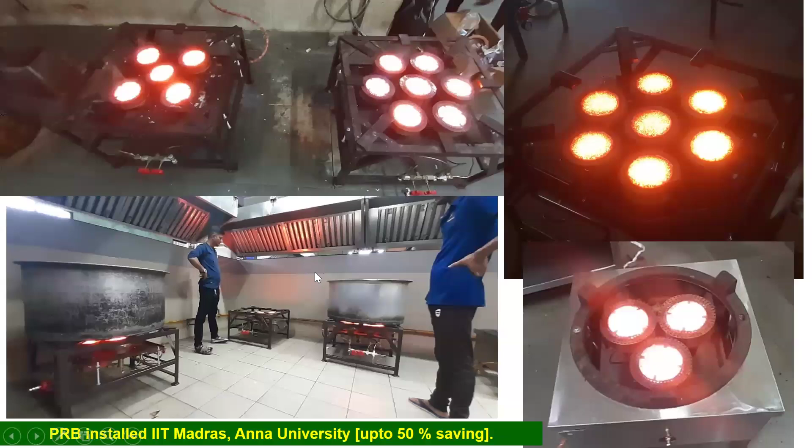Similarly, we have installed many such installations at various institutes like IIT Madras and Anna University. Recently, last week, I was at the Indian Army in Bangalore; they have also been given our burner and are using it, reporting about 40% savings. Now this technology is being tried by several outlets, and people are very happy and happily adopting it.

As I already mentioned, we also drafted the BIS standard for several fuels, including methanol-based and ethanol-based ones. Many of these are drafted and already in the public domain.

LERC is an agency governed by various oil companies, which is a government organization that certifies the efficiency of various burners. As per their certification, our burner's efficiency is about 62.5%, against the standard best-rated one as per BIS, which is 45%.

Many other things are also done. Even for the cluster burner, we got about 54.8% efficiency, where the standard efficiency is close to about 35% or so.

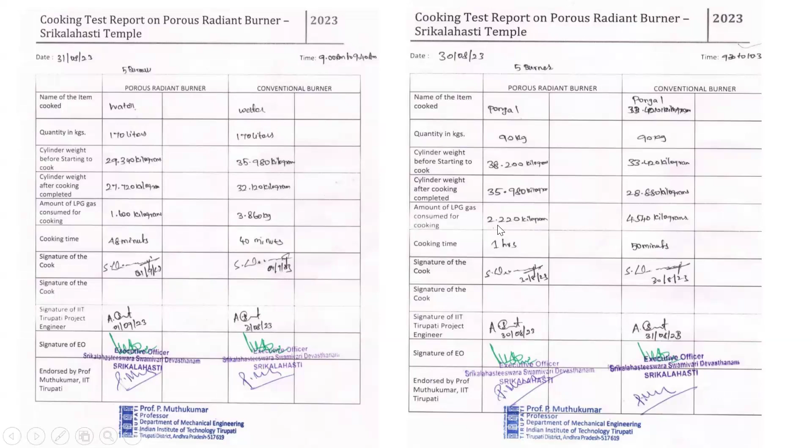Their conventional burner consumes about 4.5 kg of LPG, ours is only 2.2 kg. And similarly for the other product also I'm going to show here.

So this is the Kalahasti temple. They have given the yearly average, about 35 to 40%. This is the annual savings average.

And the people, the cooks and everyone, are really enjoying it, because in case of our burner, when you cook, you don't feel any heat because nothing will come out. All the heat produced during the combustion of the fuel will be directed to the vessel. So nothing will come out, and people can happily go close to the vessel and work.

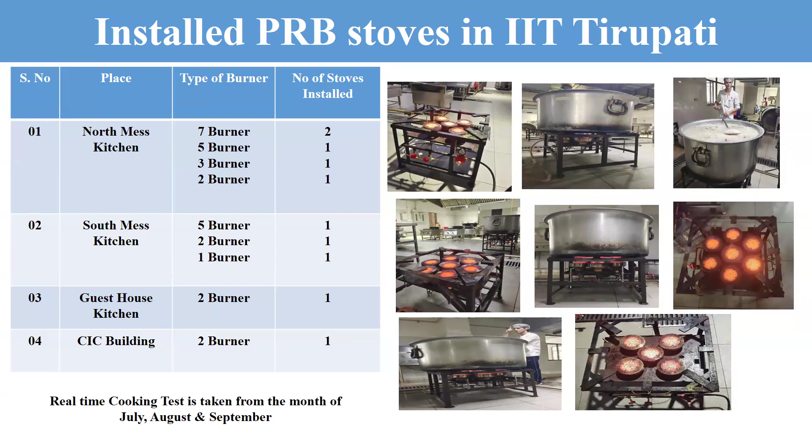And more importantly, this burner will not produce any soot, which means the vessel never gets blackened. This also provides very friendly cooking, meaning the effort spent cleaning the vessel will be very less. So there are several kinds of benefits using this technology.

You can see here, there are many. More interestingly, for rice cooking, about 60 kg of rice cooking with the ring burner, that's the best rated ring burner, the average consumption is about 4 kg.

They have done this experiment for several months. Whereas our burner, for almost the same quantity, the best performing burner consumes about 90 minutes, whereas our burner consumes around 85 minutes. Time is also relatively less, and average fuel consumption is only 3 kg. Now you can see with the best performing one we got about

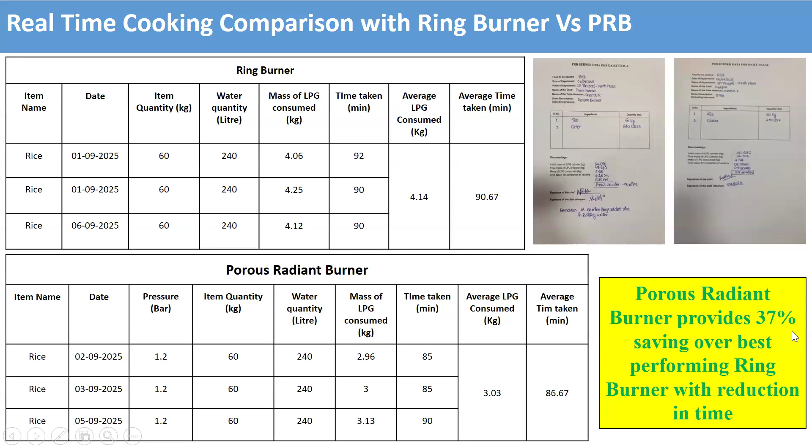And similarly, they also prepared dal. For dal also, almost 55% savings we have recorded.

So they have done the techno-economic assessment. The savings, if you see, only with our hostel with 1,800 student capacity, the yearly saving will be about 18 lakhs, whereas the investment these people have made for this burner is less than 6 lakhs. So you can get almost 3 times your investment back, or if you leave out the investment, 2 times your investment as net profit.

And if you see the CO2 reduction, when the technology is used, the amount of CO2 reduction will be roughly about 1,500 tons of CO2. That is huge.

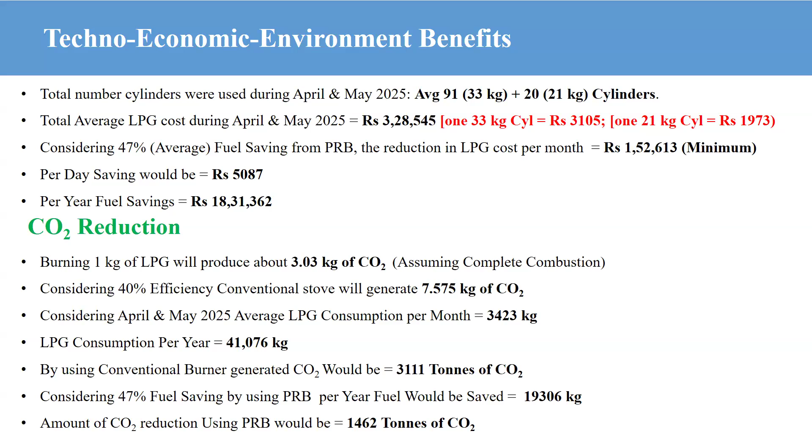Even if you take the CO2 at bare minimum rate, carbon credit of $3 to $4 per ton of CO2, this will be huge - almost equivalent to your fuel savings. By 2029, our campus strength is going to increase by about 40%, and we are going to become 3,000 students, which is already approved. With that, the fuel savings may go beyond 25 lakhs. This is only for one institute. So if this technology is implemented across India, the fuel savings by the government of India will be very huge.

And not only that, it can also provide you a better working environment. From our investigation, we found that if any cooks use this technology for about 10 to 15 years, their lifespan will also increase by about 2 to 3 years. So they won't get any kind of respiratory problems or health issues, and they will be very healthy. There are many lateral benefits.

This technology is highly recognized by almost all ministries here. Nearly about 260 media outlets reported about this technology, not only here in India, but also in the US and Germany and many more countries. This also secured first place among 250 projects funded by the government of India. There are many recognitions we got, and recently we also got the Abdul Kalam Technology Innovation National Fellowship for this work. Very recently, I was also elected as a fellow of INAE for this work.

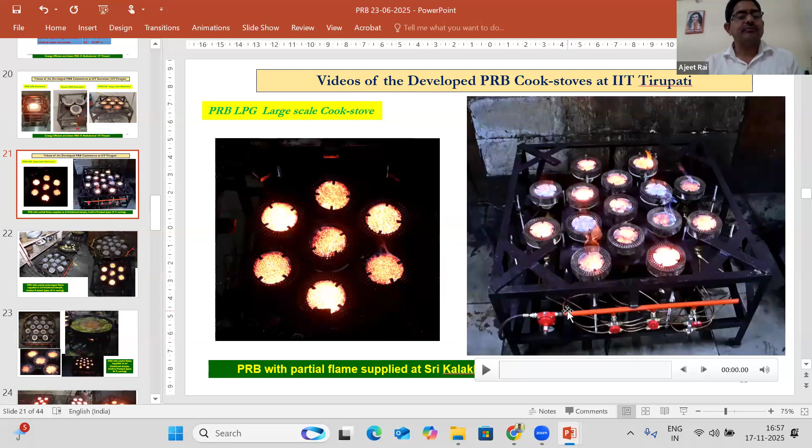This is a normal day-to-day application. I thought the participants would be interested, that's why I took this topic. Initially I thought of giving a talk on hydrogen energy, hydrogen storage, and other related applications. Anyway, I think some people are already there, so probably they may talk about it. No issue, sir, if there is any possibility then we will inform you a day or two earlier. It's fine, I think you can give the opportunity to other speakers. They will be more excited, but I am too.

We have supervised students in this area itself, around 10 students have already graduated. So far I have nearly 42 PhD students under my guidance.